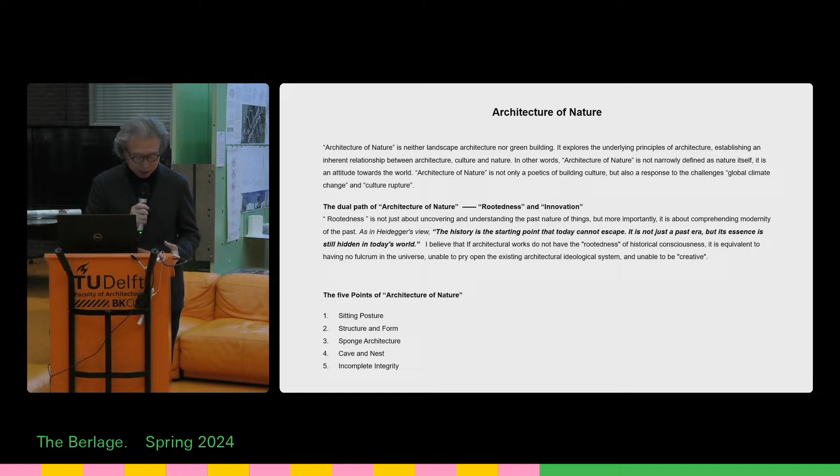I'd like to quote Heidegger's view that history is the starting point today cannot escape. It is not just past era, but an essence still hiding in today's world. I strongly believe that if architectural work does not have rootedness or historical consciousness, it is equivalent to having no fulcrum in the universe, unable to reopen the existing architectural ideological system, and unable to be creative.

There are five points for the architecture of nature: sitting posture, structure and form, sponge architecture, cave and nest, and incomplete integrity. This incompleteness constitutes a deeper level of integrity within a larger system and broader context.

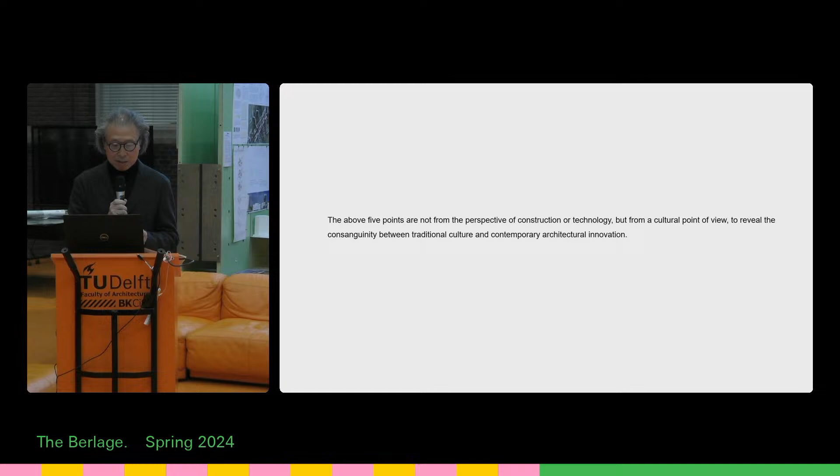I believe these five points for architecture of nature are considered not from the perspective of construction and technology, but from a cultural point of view, to reveal the consanguinity between traditional culture and contemporary architectural innovation.

The first project I want to discuss is one I realized a few years ago in a very important porcelain city in China, the Imperial Kiln Museum in Jingdezhen, Jiangxi province. Jingdezhen used to be the porcelain capital of the world. During the Ming-Qing dynasty, it exported huge amounts of porcelain to Europe. Even in Delft, if you go to the museum, most of the porcelain, the blue and white, or even the green porcelain, came from this city, Jingdezhen.

During the Ming dynasty, it became the imperial factory, making porcelain specifically for the emperor. But this city grew naturally because of the porcelain industry. It started from a bottom area called Sanbao during the Song dynasty, 1,000 years ago — the early Chinese porcelain actually goes back to that period.

In the middle period, you see Luoma Qiao, from the Yuan dynasty. This area produced porcelain like the famous blue and white porcelain — probably the most identifiable Chinese porcelain, whether in the British Museum or the Metropolitan Museum. A lot of that porcelain comes from this Yuan dynasty period.

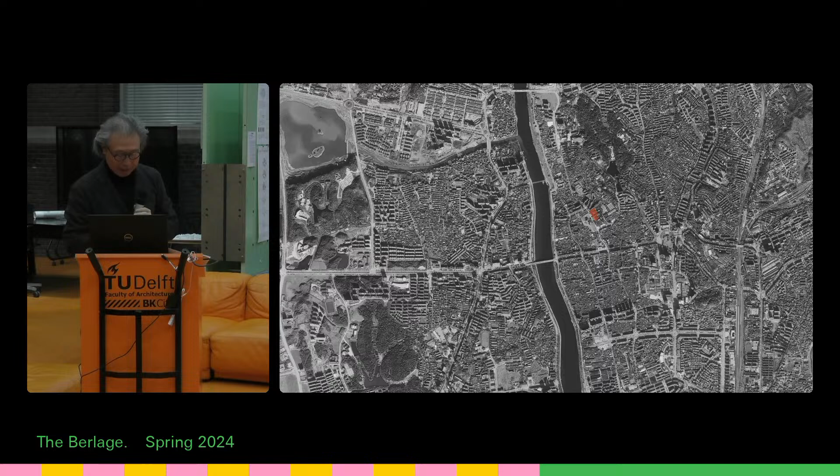Later, during the Ming-Qing dynasty, you can see they started to produce not only blue and white but also more multicolor porcelain. This shows how their industry developed based on nature.

This river used to be the west boundary of the city, and the city grew from south to north. So it always developed along the Chang River. Even 20 years ago, beyond the left side there was nothing here—only forest, hills, rivers, and creeks. This was pretty much a nature-dominated tradition.

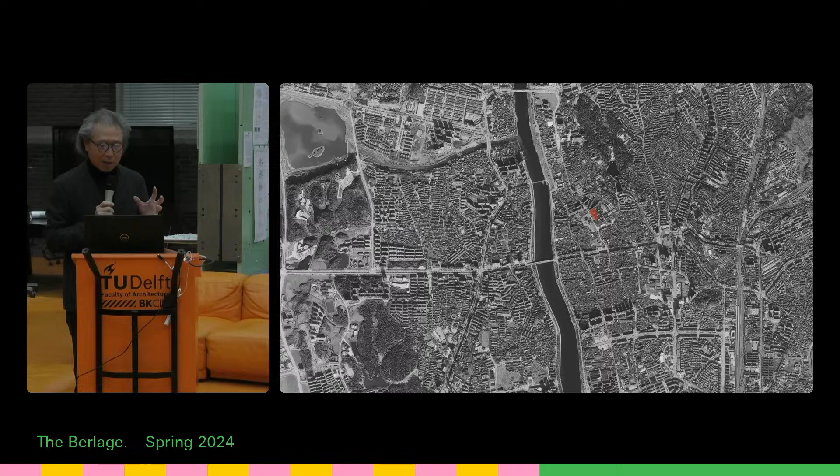The reason they came here is because they have very special soil, so people migrated from far away just to build a brick kiln and make porcelain. This was their whole life. The red star marks the location of our project.

If you look carefully at this urban fabric, the small alleys not only connect people from their workshop and kiln to the Chang River, but also give a sense of how people survived under extremely hot, humid climate conditions. The roof overhangs and small alleys create shade during summer and protect from rain.

Once you go through the small alley into the housing, it's very special—a vertical, tall housing, like 3 stories high, but the courtyard is not flat. The courtyard is more like a vertical chimney, a tap, creating a chimney effect to deal with the heat and weather.

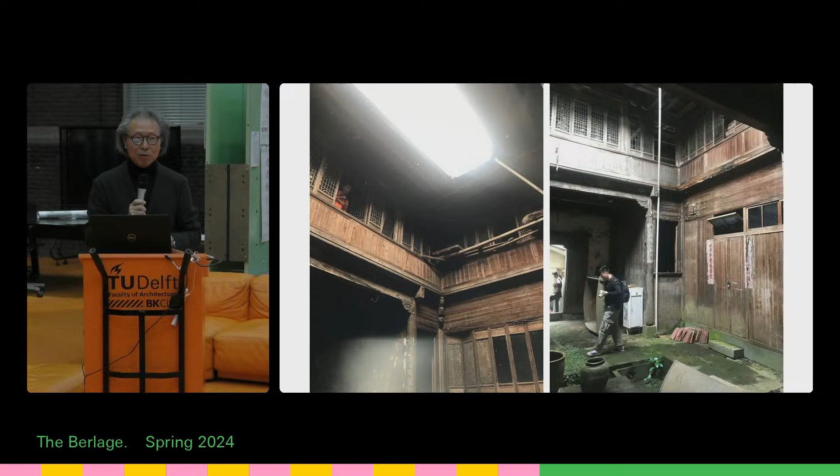But the small alley is more like a wind tunnel. Even in summer, when you walk into this small alley, you can still feel the wind against your body. This gave us a lot of inspiration on how to get ideas through this nature-based tradition.

This is a typical cell of the city—brick kiln and workshop. You can see the workshop here, but they also build housing adjacent, which together forms the whole city. The whole city is built based on this complex.

When I was working on this design, I was wandering in the old town and found craftsmen rebuilding the brick kiln. They frequently rebuild it because it's a very thin brick shell that can only survive maybe a maximum of one year—you have to demolish it.

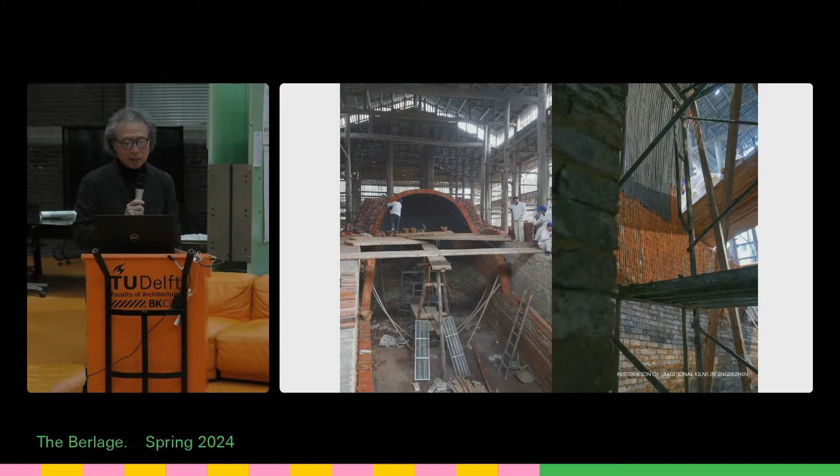When they build this brick vault, they don't use scaffolding. They rely on the material, taking advantage of gravity. This film actually shows what I'm talking about—look at how they control and make this masonry.

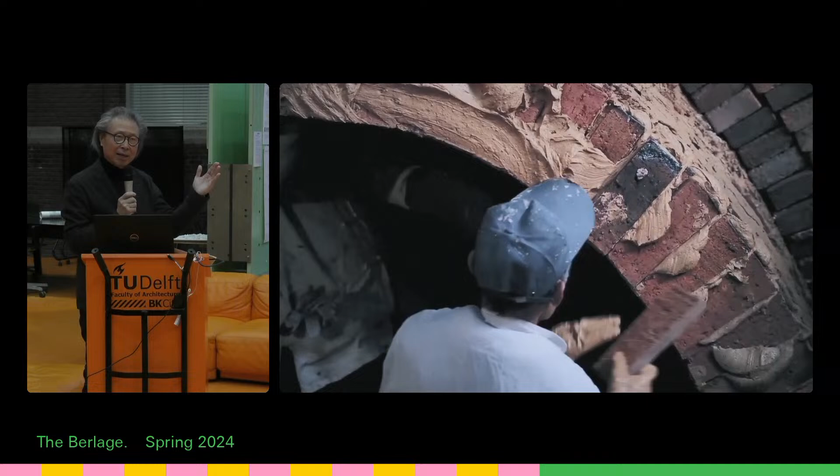They use their fingers to control the curvature. Each horizontal cut—each brick layer—is one horizontal section. You can see it carefully. They use very light, thin, small bricks to make an egg shape as a shell, relying on gravity and the material.

But if you think about it today, when we work with digital design to deal with such complicated double-curving forms, we always cut through sections to transform the three-dimensional curvature into two-dimensional. This is how we approach complicated forms today.

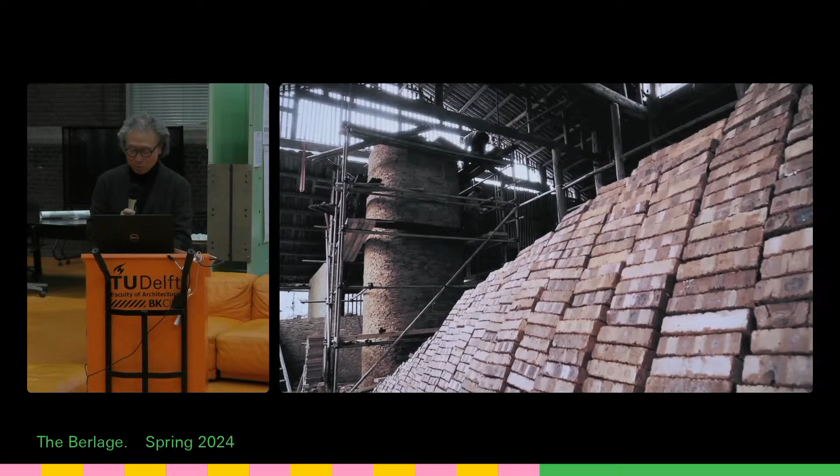But this has some common sense with the old traditional kiln—the craftsmen also used a similar idea. Another important local phenomenon: since the brick kiln has to be demolished frequently, there's a lot of broken brick, so local people recycle this brick to rebuild housing almost everywhere. This is their tradition.

This is the site—you can see the adjacent green part, which is the imperial kiln relic site. There used to be a lot of workshops, but right now almost nothing remains above ground. The adjacent area used to be a fire station, but they relocated it. We're going to build the kiln museum here.

Looking at the surrounding area, it's such a complicated urban fabric—traditional housing mixed with kiln complexes, and also a lot of factories built after 1949, maybe 10 huge factories, plus social housing typical of the early 90s surrounding this area. You feel the whole city became based on different periods of time.

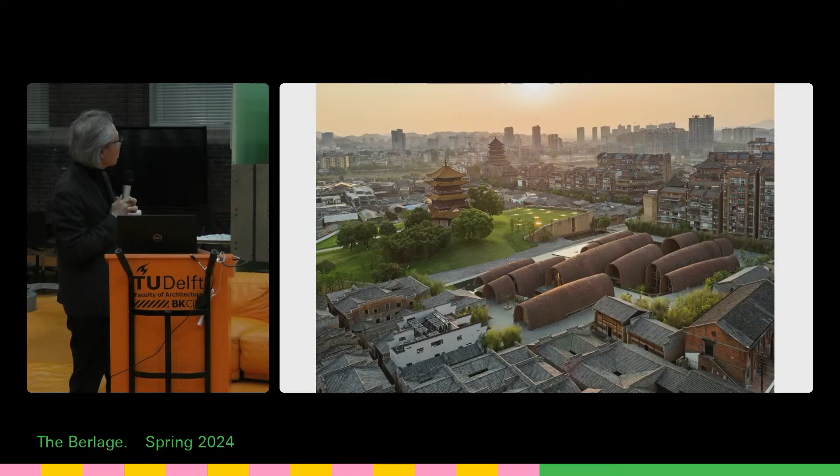Not only the physical form, but you also bring the light in, leaving a lot of space. For example, you can feel the cave and the nest—some space much more enclosed, sometimes really open, in structure and form. You can feel the whole vault structure isn't trying to build beam, column, and then top above the arch. Actually this whole structure, this form, is the architecture form. So that definitely shows strongly the sponge architecture concept—not only the porosity character, but also showing the potential for the program.

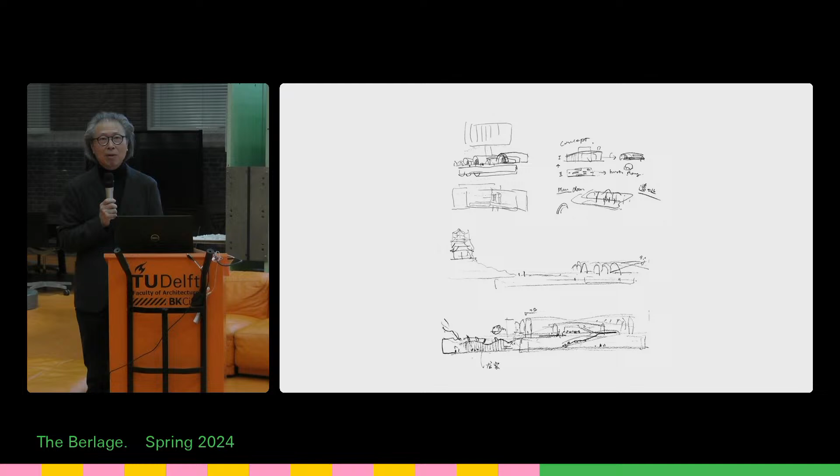But today's topic is like roots, right? The roots I consider—why I choose this architecture form or material—is actually more cultural decision making. The kiln complex, not only for making porcelain, but most of the time it became a social involvement. I feel the kiln—the brick, the things—if you think about where the porcelain comes from, it's the brick kiln. People daily working in and out from the kiln. So I feel there's a strong consanguinity between human being, architecture form, and the contents program. This is the reason this museum was eager to recreate a similar experience, but based on a contemporary idea. So this is what I call the cultural roots, climate roots.

One thing I'm really proud of for this project: after we built a 10,000 square meter museum, we never used air conditioning in summer. I think this can give a lot of rethinking about tradition—they also have a contemporary idea.

We used to consider this as very old, the city or architecture. And then we see the style or design process—it's a lot of model making. But this model strongly represents how we worked during the design process.

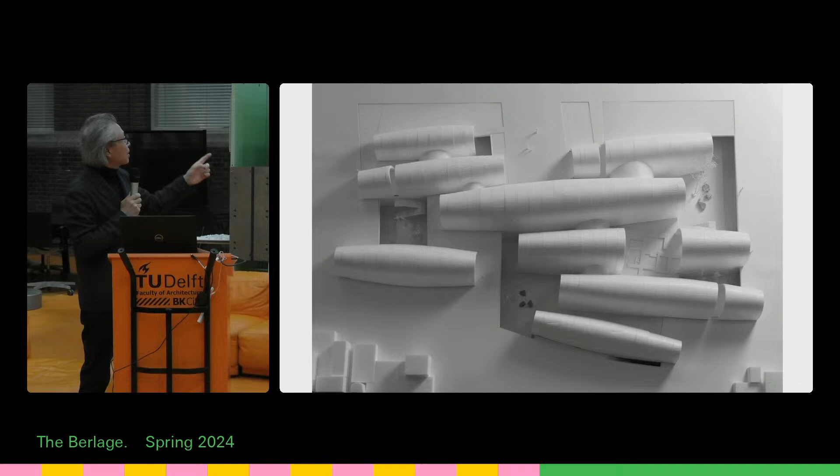I'm not encouraging my team to use 3D print rather than handmade models. Why? Because for this specific design it's so complicated. You feel the challenge, right? You feel this architecture—if you really try to realize things, each vault has a different curvature, different size. But even for each individual one, maybe bigger, smaller, always changing the curvature. How do you do that?

So I strongly believe architecture is not sculpture. We cannot just rely on modern technology to meet the challenge. I think that's not smart—that's also not the nature of architecture. Architecture is supposed to be based on geometry, based on a system, simple, easy to build.

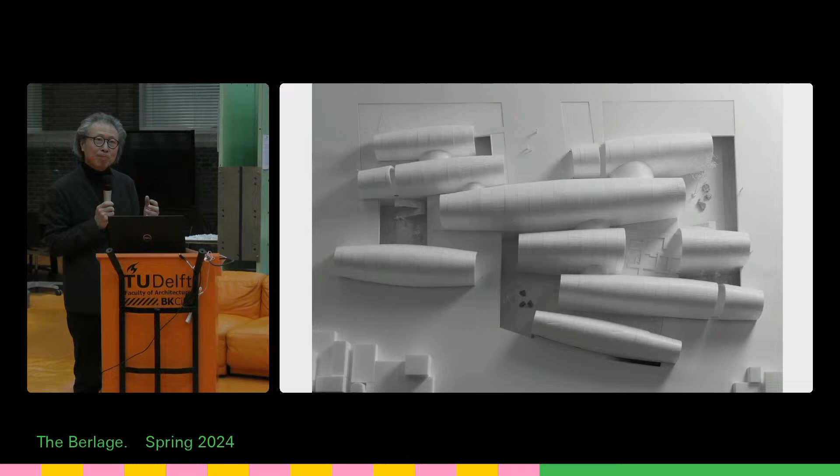But this model gave us a lot of confidence. If you look at the detail, the horizontal cut, that allows you to think about how the craftsmen built this complicated brick kiln. So that gave us an idea of how we could build such complicated architecture based on a very simple construction process. Once again, we did many different scales of the physical model.

This is the reason sometimes the computer just really pleases architects. When you see it on the computer, maybe in reality this space is so dark, but it gives you a comfortable lighting adjustment—or maybe too bright. But after you build it, you might face the disaster of it being too dark or too bright. A computer always lets you feel so comfortable, so we have to rely more on the physical method, like models—I think that's really a good way. But the computer, the digital design process, is still an area we have to rely on. We just have to really consider them as tools rather than letting them drive everything.

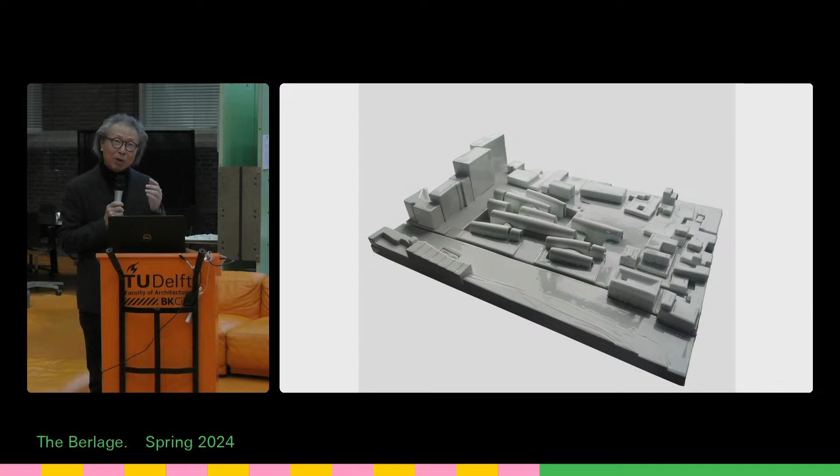So many models were made during the design process, but except this one—this is not our design model. This is us trying to translate the architecture model into a piece of art. Currently this model was collected by MoMA, showing the whole model-making process, like what we create as the architecture.

So this site plan—you can see a strong orientation to dialogue with different urban fabric and construction style, and then a lot of recycled brick. You can see this brick became really broken pieces, really small. You have to use new brick mixed with this older brick.

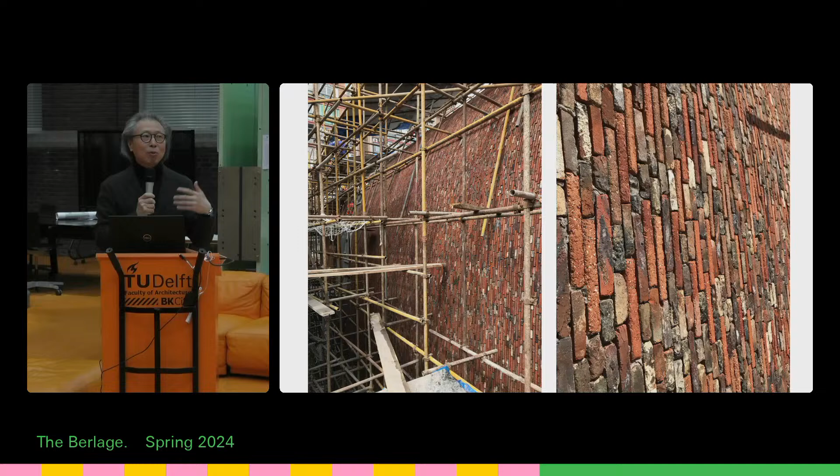So this is pretty much when we're doing the construction. You can see the different bricks mixed together, the old ones and new ones. Even the new bricks contain a lot of trash from their porcelain making, like a pottery kiln case, they contain porcelain from during the burning of the porcelain. After it became mesh, it became one of the materials for those bricks.

And then this is the important scaffolding we invented. We needed to think about how we could create such variation in size or curvature change. The scaffolding we invented sits on a track, so it can move from this way to another way.

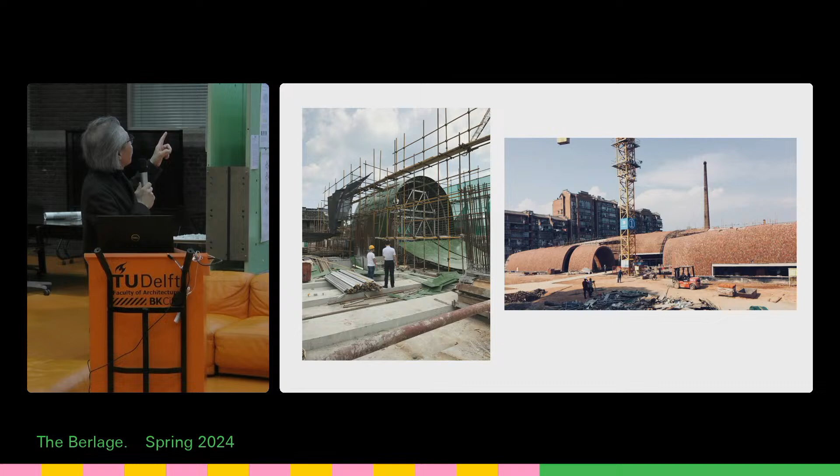We just use very soft wood forms with the scaffolding to adjust. This scaffolding can be adjusted, and then we can control the curvature with this very soft wood form. Piece by piece, like in the starting model we did, eventually the curvature changes along the construction.

And this is after we built it. This whole building somehow lays prone in the ground, right? Rather than really monumental, it's very low, very humble and modest, in dialogue with the factory and the historical housing.

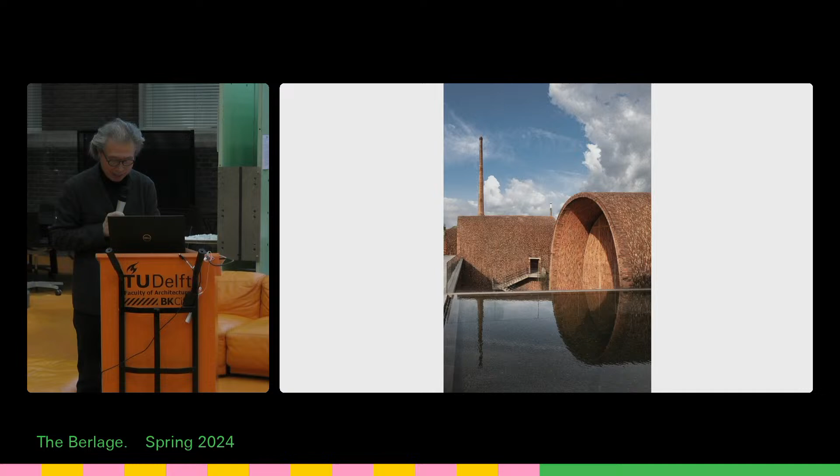Once you walk on the gravel floor, it produces sound, and you can also listen to this reflecting waterfall, they have a lot of water sound, making a huge contrast - very rough brick vault contrasting with peaceful water, and also beyond the factory. When you close up, you're going to see a lot of material variation.

You also feel, when you walk along this waterfall, you see bamboo beyond. This gives you a sense of the Jiangxi area. If you go to the suburbia of Jingdezhen, you always hear the creek sound, but you never see the river or creek, only the bamboo. The bamboo also produces the sound.

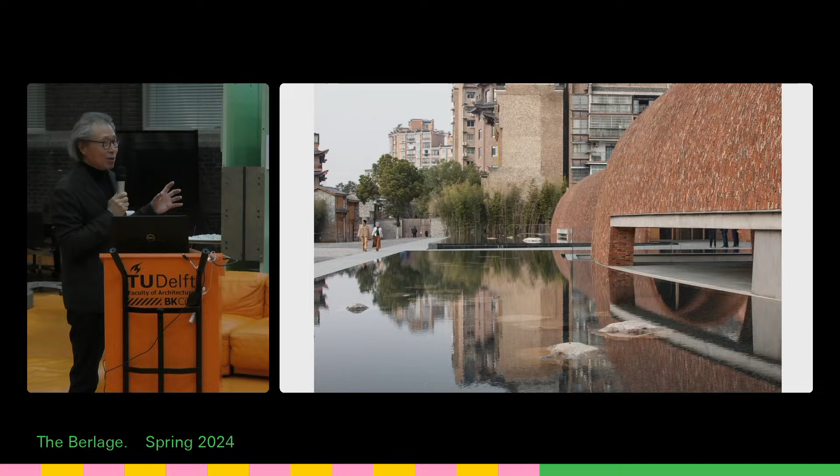And this water also represents something poetic, the way you see the stone underneath. The stones are more like a group of fish underneath the water, but only a few of the stones pop out above the water. This not only gives you an artistic feeling, but also a lot of imagination, like early Chinese philosophy, which considered the universe composed of water and three islands.

But in this modest way, it gives people guidance on how to flow into the museum. It's not that you feel the solid brick vault is against the people - actually you can feel it welcoming people to wander, following the water's gesture, flowing into the museum from outside.

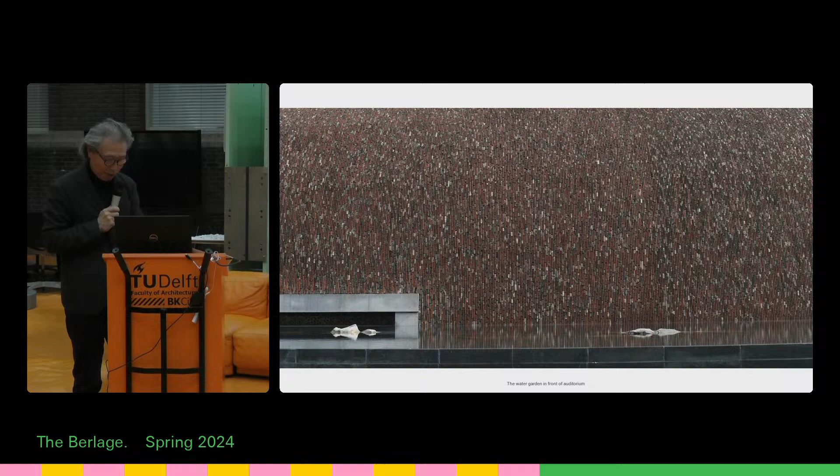And this also shows a strong tectonic character - concrete beams and columns make this horizontal window, the cube, or the vault, supposed to go from the bottom to the top. When you're cutting this, you have to find some concrete way, but it turns quite poetic. You can have a sense of imagination about this old brick, and there's always space in between, interior or exterior. This is not totally like a strong object.

When you walk in through the big arch, you're going to follow more natural light, and you start your journey more like the major permanent circulation. Then you go to the right side, to a secondary arch, which brings you into the bookstore and tea house beyond. If you continue another way, the smaller arch actually connects to this linear vault, which brings you to the auditorium room.

I think in architecture, you have to create certain different gestures. The people walk in, they know where they are. They have to figure out how they're going to freely flow into the major circulation. Definitely, you also create a kind of mystery - you feel, okay, this is the museum, but I saw a few vaults beyond. And then you start to explore more.

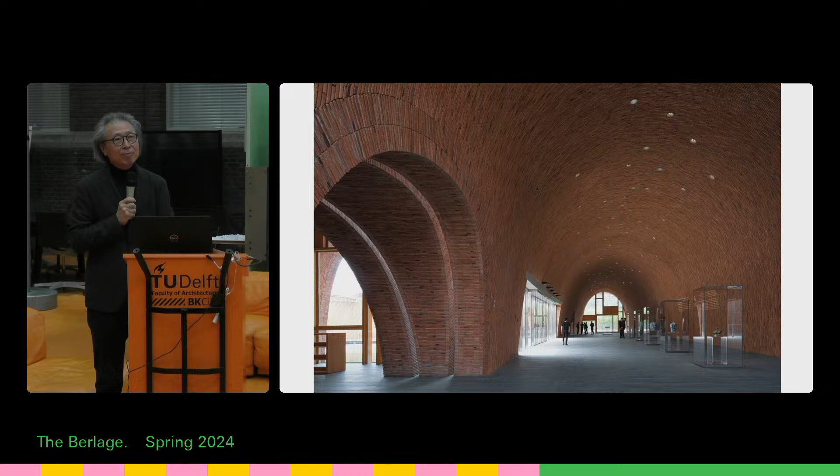You start your journey, and then from interior, go to the in-between, right? This is like an open vault. It's not 100% interior, but it works with the ruin site.

This ruin site was quite a surprise for us after we started construction. When they were breaking the ground, we found some ruins. We tried to integrate this relic into the museum, and that gave the museum much, much stronger ideas to really integrate this piece of the site.

The closed door side, this open arch underneath is the amphitheater, and then beyond is actually one of the galleries. But just remember that this is a porcelain museum, a ceramic museum. It's not an art museum, painting. You have to really care about humidity, but here, it doesn't matter.

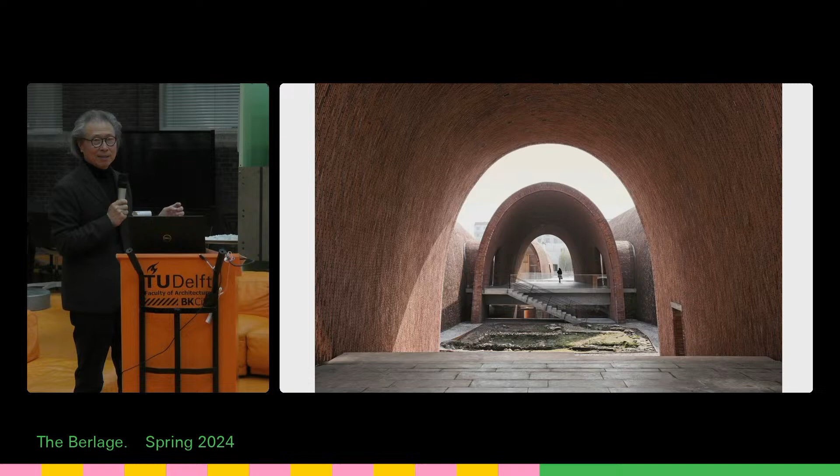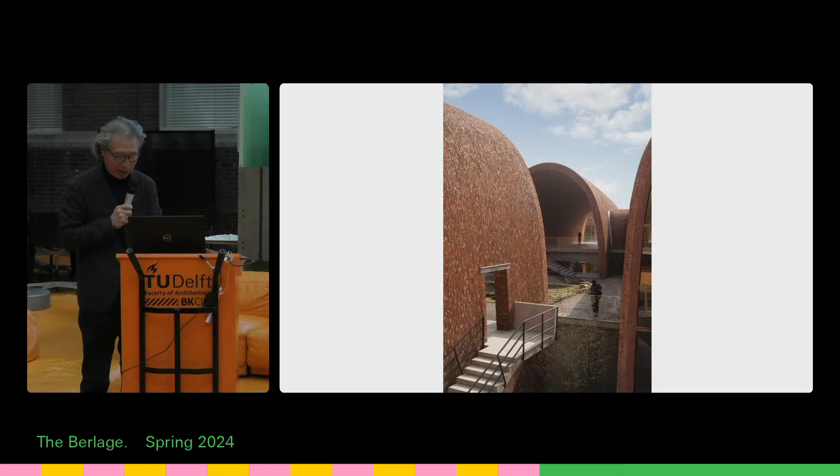Once you go down close to the ruin, you can also see beyond - another courtyard, and then downstairs, which is more the major space for the exhibition, part of the exhibition circulation. From a different angle, you can see how rich it is in terms of space and level change. This is interior level, then you go to the Ming Dynasty ruins, urban city level, and then you can continue down to another courtyard which is actually in the lower level.

Once again, you move from the half-outdoor, half-indoor space into another interior space. But this is quite different from the foyer, right? Because they're much smaller, much lower, and then they carefully worked this object in transparent glass.

And then you turn on this concrete subtle stair, flowing down to the basement level. When you go down, you're not facing against the wall - it's very nice, very light, the sunken courtyard.

People flow down to follow this courtyard. You can hang out outside, you can smoke, you can have some break. But at the same moment, you're going to see a lot of museum people working inside their working space - that's part of this permanent exhibition circulation.

When you see the transparent glass, it never really attaches to the wall, right? It's also not perpendicular. This interior space is more like a fish belly, and the configuration for this glass is more like a fish bone.

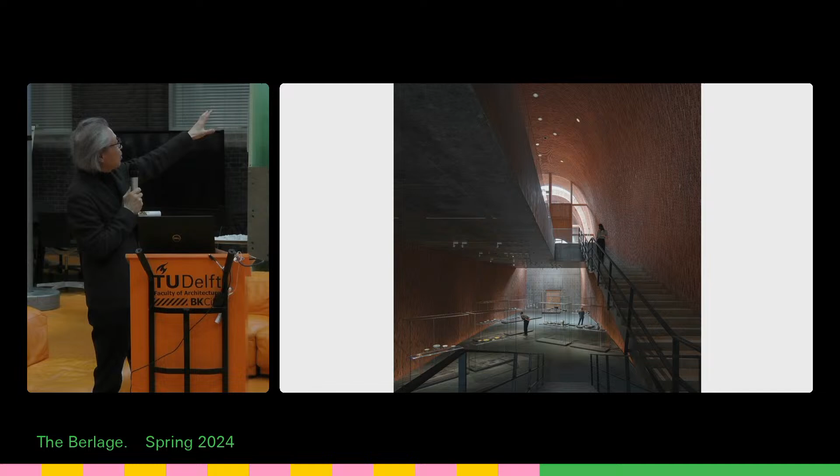I think once again, this is exactly what I really emphasize - the consanguinity between the contents, architecture form, and human being. You can see it's very intimate, more like people walk in the cube to see the porcelain.

This is the reason I always ask where porcelain comes from. Porcelain doesn't come from the natural side. It must come from the artificial, the facility - people create a kiln just to increase temperature. Porcelain needs 1,300 degrees, so in nature there's no such high temperature.

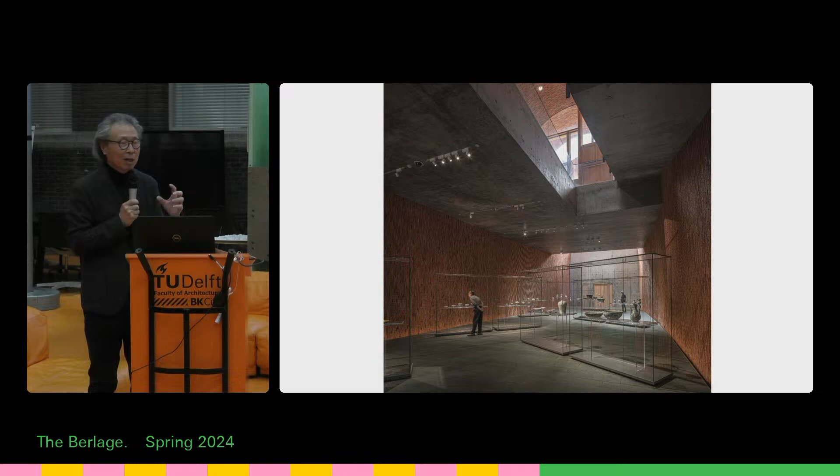Also, porcelain needs - not like a painting where you see it one way - you need to look at it 360 degrees around. You need to walk around, and then you can see the bottom, you can see the top. So even this, like a table, everything is transparent. This is not designed by somebody else - everything is designed by our studio. Architects actually do many things.

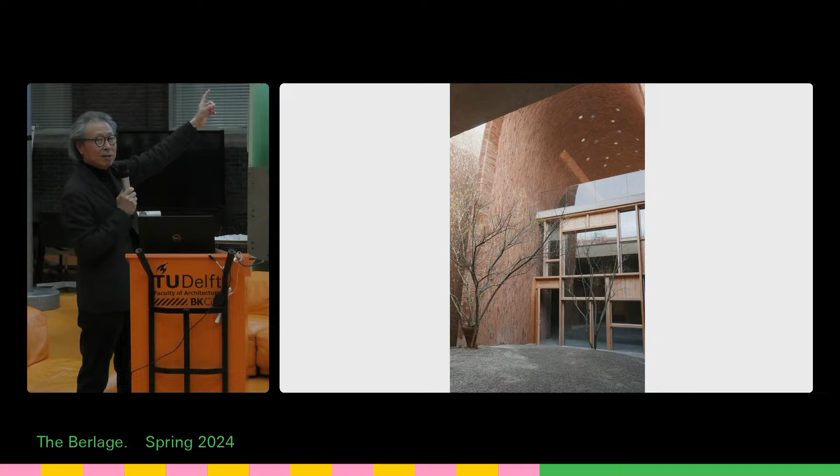This is once again, you go into another courtyard, but you can see upstairs, the tea house, right? Covered, and then interior. You're crossing this little courtyard into a different program. And then this is the end of the major circulation, the permanent circulation.

One way you can see beyond - for example, you can see the end is like the courtyard. We have a lot of foundation that was excavated during the construction.

And then once you go back, you see the stair. You start wondering where I'm going to go. If you look at this atrium, this is the only big atrium in this museum, located at the end of the circulation. You're going to see where you started from.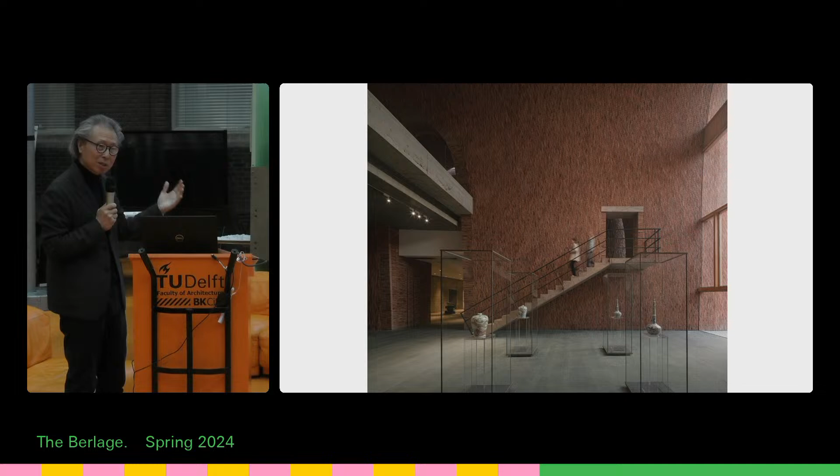The stair never shows the whole thing - you only see half, and that creates a kind of mystery. You see the door, you see the light, but you don't know what is beyond. That's going to attract you to climb up the stair. You see this mystery, right?

It's natural light brushing on this wall. People going to use their hands to touch things. You have a lot of recycled material containing the timeless memories. Architecture is not only visual art, right? It's more like associations - different light, touching, even smelling, and so on.

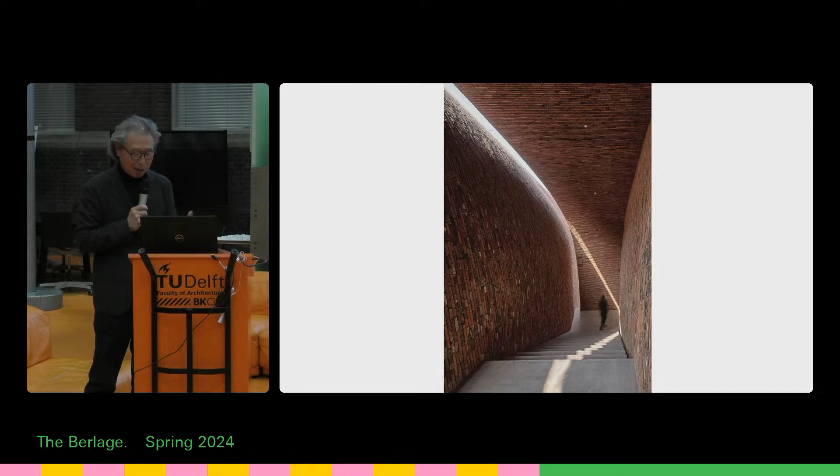So once you're climbing up, you're back where you start, the foyer, and then you're going to see the little atrium from the lecture hall. Once you walk in, you see this whole vault covered, one like today, right? It's more like a chapel of the academic - people gathering here, you can join the symposium at the same moment.

If, for example, today maybe I'm talking very boring, right, at least you can see something like this window. You can see through that horizontal cut. I mentioned here, beyond is going to be a water reflecting pool, and also beyond is the ruin site. This is a tea house.

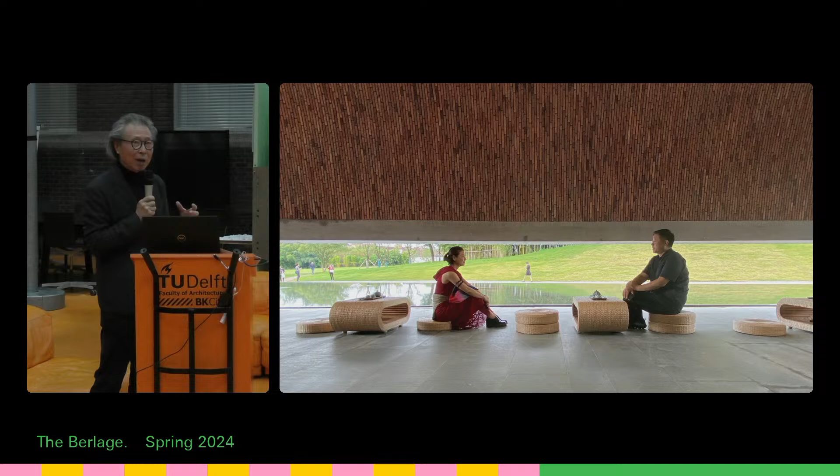So once you concentrate, like in the bookstore, the wall is going to block your eye, and then somehow to invoke you to sit down.

You sit down, you see through, you use this water to reflect in the sky. You see through, see beyond, ruin site. Things ruin always talking about the underneath earth, right? So this horizon became quite interesting.

When you drink the tea, use Jingdezhen porcelain, and then you pretty much enjoy this heritage. This picture showing the strong character for how this architecture, based on the system, how they ventilate. How transparent - even some wood doors, wood windows, they can operate, open, and then one can be concentrated.

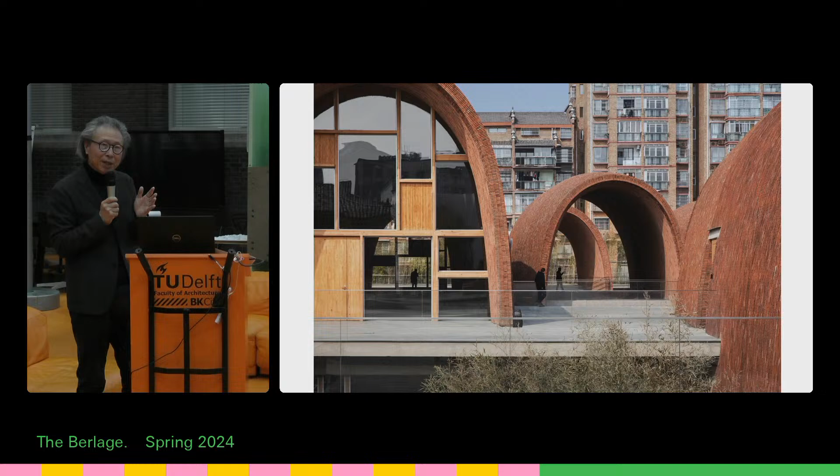If you recall, in general overall, the building, they somehow not only parallel layout each vault - they more like assignment, kind of, they have slightly angle to dialogue surrounding to create a tension between each break of the vault.

So maybe I'll talk a little bit more in detail about this project. I really want people to share what is the idea behind it. The second project is what we're working on now. This project actually just started last October. The first project talked about porcelain. This is talking about 4000 BC, more like a New Stone Age pottery.

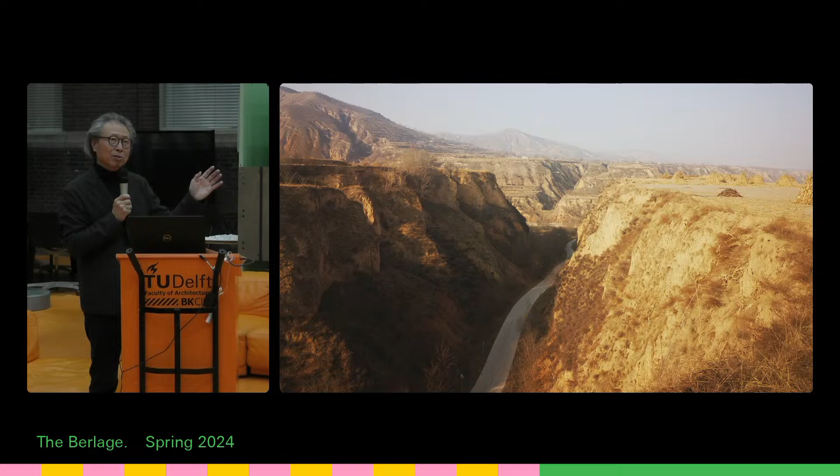This project is located in Majiayao, Gansu province, Lintao. This ruin site settlement was discovered by the Swedish archaeologist Johan Gunnar Andersson in 1924. Actually, he was traveling along the Yellow River, much further upstream, and he found a lot of painted pottery. So he realized there must be a civilization here, along with excavating so many pottery pieces.

But this geography character gives you a sense of how the local architecture is supposed to be. The clay - you cannot, based on it, like a stone masonry, right? You're more like carving out, more like a cave in this specific side.

So this is three - you can see the ruin, right? This is the ruin museum, just adjacent to this heritage. And then at the top of the hill, we're going to create an observatory for the people, take a break, more information center.

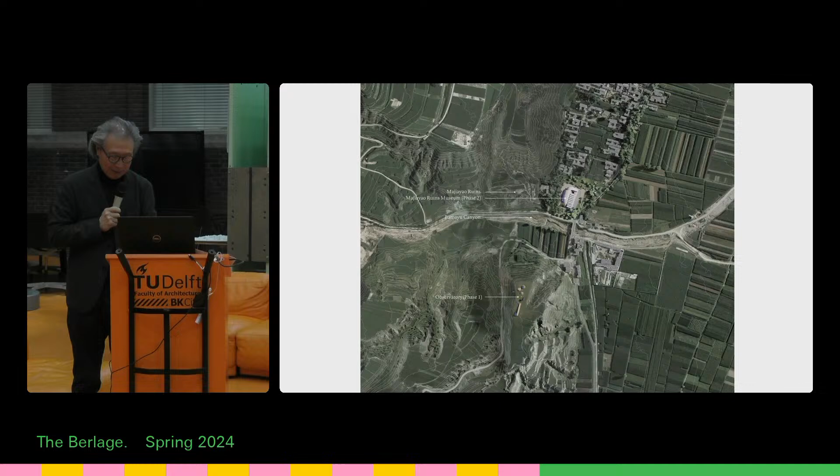So this ruin museum and observatory crossing the canyon. This is a typical canyon, always perpendicular with the Yellow - actually it's the Tao River, and beyond, more like the Yellow River on the other side. So this is more like a whole nature, somehow made by nature. This is a canyon, typical water flowing into the Tao River. And then this is our museum, observatory here.

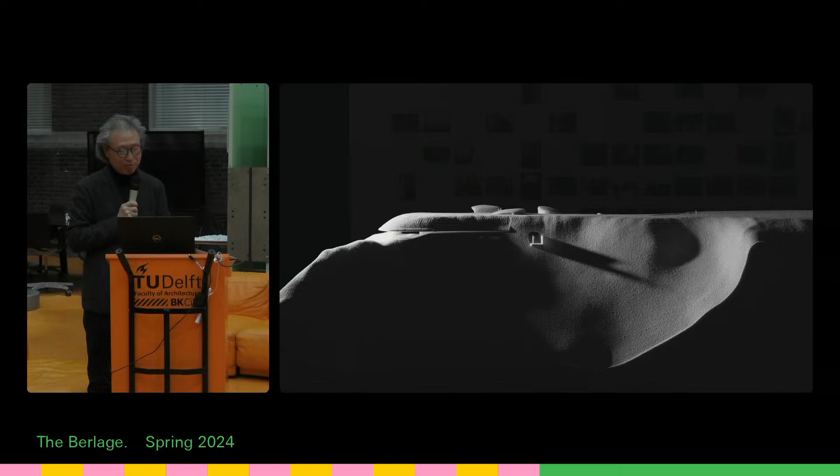This is an early sketch to show how I think about this observatory. Just taking advantage of the plasticity of this soil, making one horizontal cut, more like sketching on the earth - but the top view pavilion indicates like a New Stone Age way of making a sunken shelter for themselves. So this model showing the almost complete design - a horizontal cut hiding inside this earth, with maybe a few holes to concentrate light.

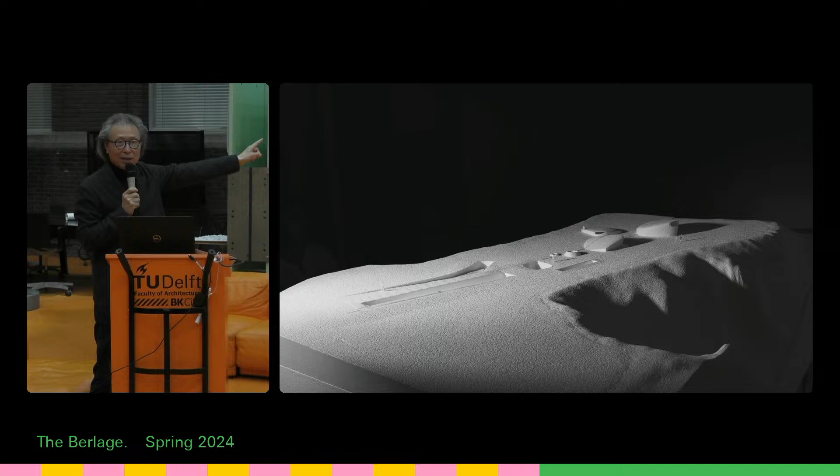But we try to use a very special construction method - for example, this soil is so soft, so weak, we have to carve out on the top in order to protect the boundary of the landscape. And then we're going to make the cave carved out through three sides - one is the horizontal cut, a few holes here, and then the other side. So this is going to be very challenging, more like we're making a tunnel. It's not normally how we build a building, but you can feel the sense of how big it is from our model.

Our designer here - but you can see this, we normally build models based on different scales, along with the design process, experimental design process.

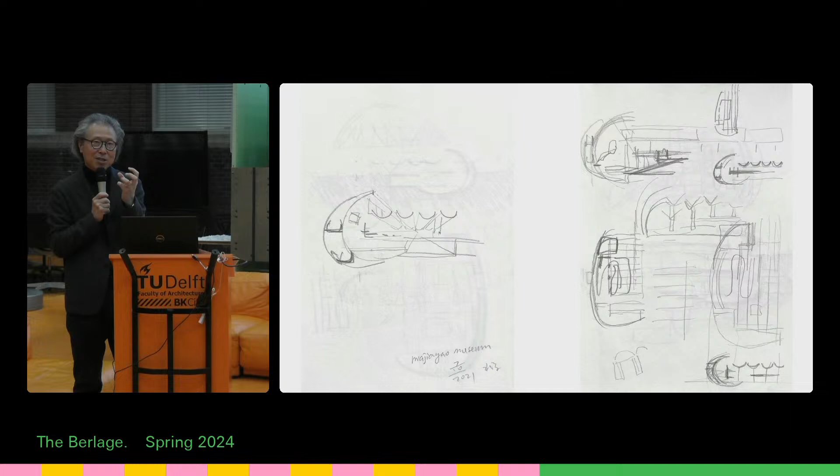This is for the museum, early sketch - but you can see a few things, cave and the nest. Locally there's a lot of caves, but I strongly believe the cave and the nest is a prototype of earlier human construction culture. I really try to use this here to create a sustainable idea. A cave always stays, right? It's very stable in terms of climate change or temperature change, but the nest is so sensitive - they catch light, temperature, and whether winter or summer, they really balance each other. I think this is a really passive, intelligent, sustainable idea.

And I think another architectural idea, which is I always ask - where does the pottery come from?

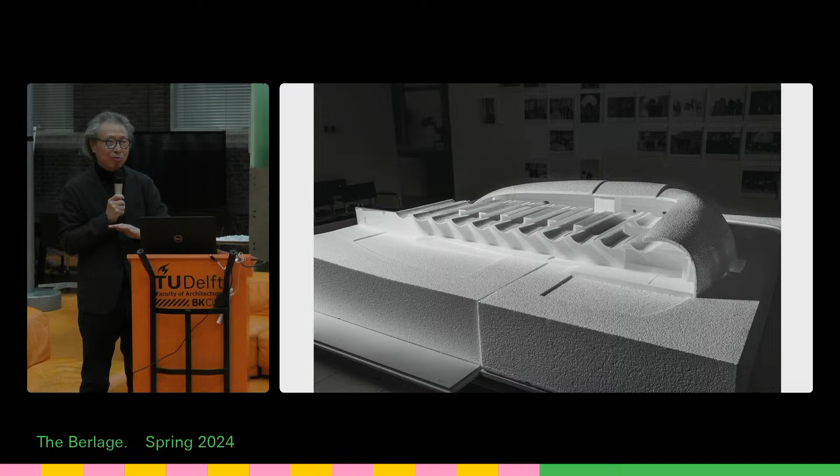They somehow also humble or modest, sunken into the depression side. So this is, you can see, the piece of pottery going against north wind, local wind a lot. And then facing south, going to have more like structure beam with a shear wall together.

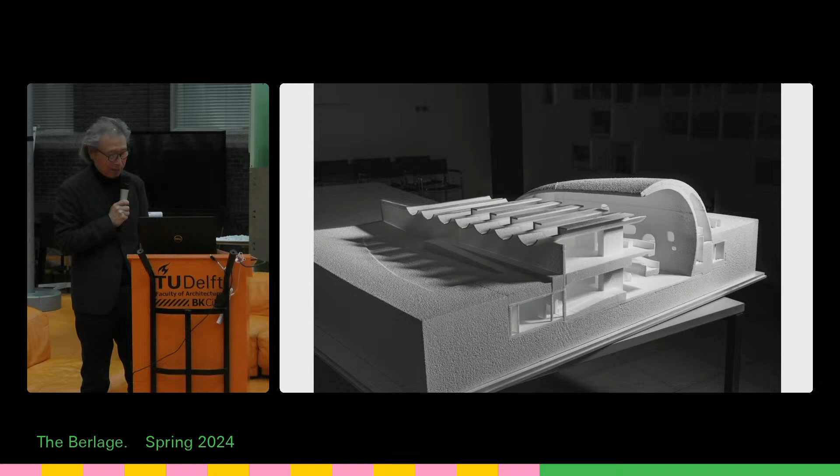One idea is for this museum, also try to recreate a sense of experience of how people were making their pottery. They must go down to the water, the river to carry the water. They climb on the hill, more like a zigzag. Whole museum, just one ramp. Ramp from the front plaza, go in like a zigzag shape, go inside the gallery, and then crossing this atrium.

You can see this ramp continue, go down, and then go up. Even between this shell, two walls, hiding some ramp behind. And then people can walk through the museum without being interrupted by the opaque space. You always can see beyond, always can see the sense about a local large cave on the cliff.

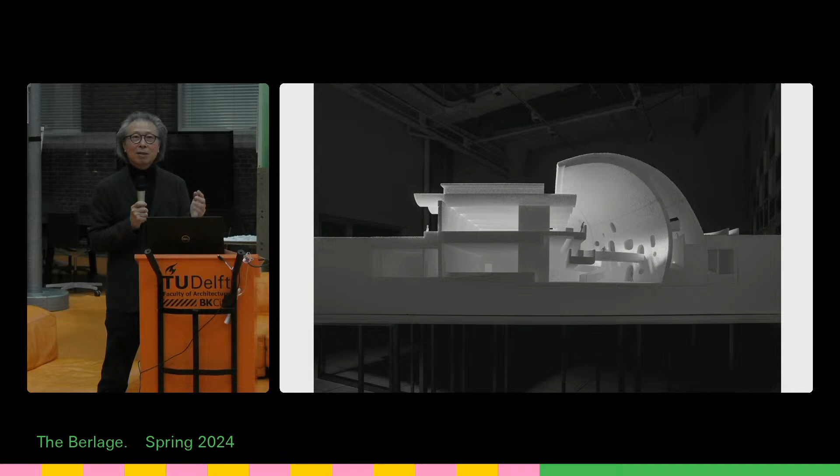This art center was built in the middle of nowhere. You can see the surroundings, very generic, typical commercial real estate development. But this is a building where we test how concrete, we can push the concrete, both tension and compression, into the limit.

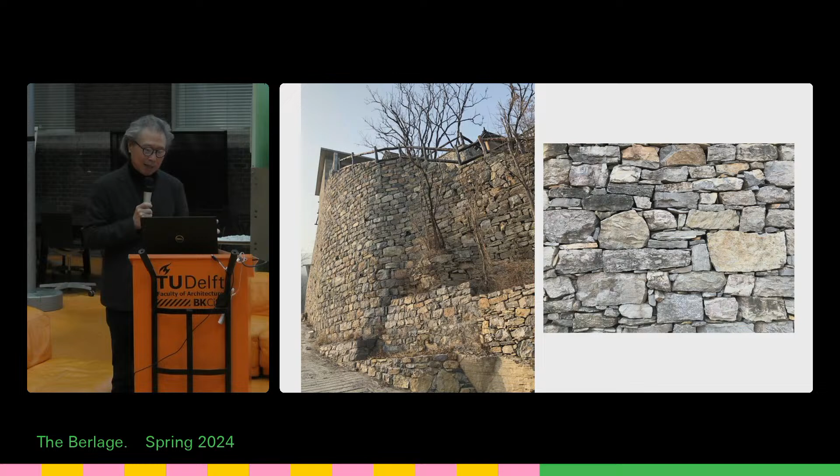So this is like a tent structure, like a pinwheel, to represent how local masonry and wood roof structure works. This is like a pinwheel, the roof forming a central courtyard. This is very typical local housing, and this is more like an early type of school in Chinese tradition—just a central courtyard with a few trees, people sitting underneath the tree with the professor, in dialogue, either in the classroom or in the central courtyard.

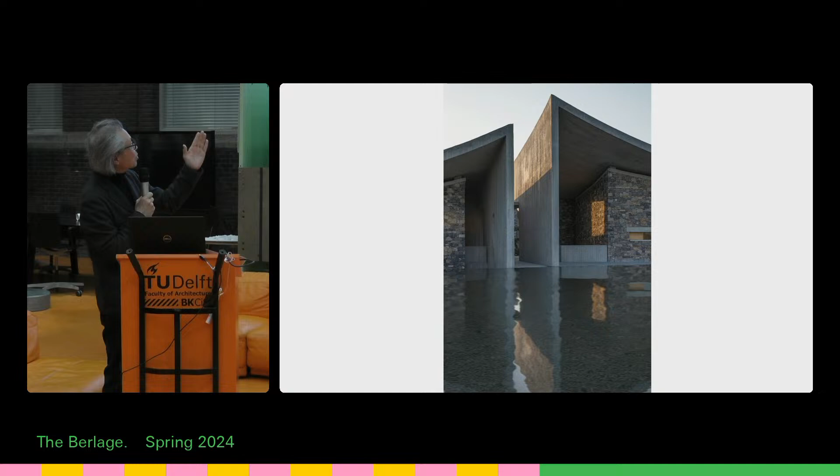So you can get a sense of how this concrete tent creates the tension between the floor and the ceiling, giving people a sense that concrete can not only have the character to be compressed for the roof, but also have the character of tension. So this is shear wall to shear wall, pulling this tent.

They also give you a sense of the large traditional Chinese roof, right? You can see this sunken courtyard, the roof with shear wall, the masonry beyond the window, and then you also can see how people interpret the architecture into furniture. This window, you see the curved roof, you see the masonry stone wall. It's strongly interpreting traditional character into the contemporary.

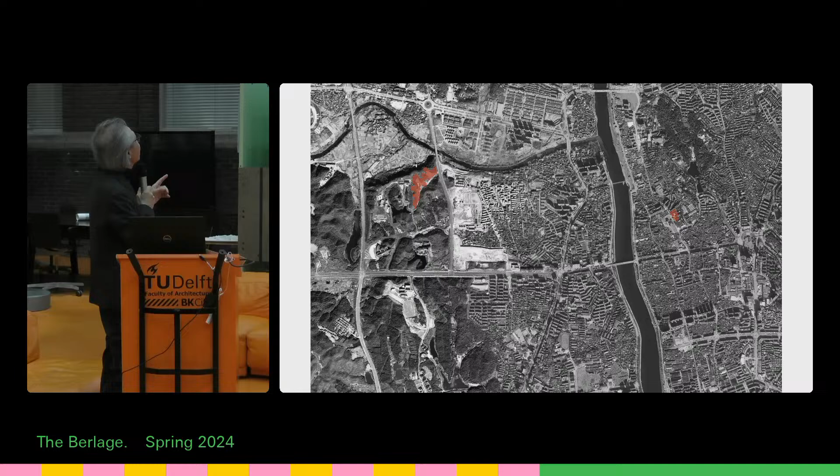Once again, we go back to Jingdezhen, but it's not the historical center area. We were invited to design an international conference center, and then we converted it into a conference camp. I do believe the conference room should not only be a black box, but also needs to somehow associate with nature.

Local, you can see this site condition. If you're traveling in Jiangxi, take the train, you always see the beautiful village settlements. They are always very free, peaceful, very simple—small square buildings, like village buildings, grouped somehow by their farming, their daily work, how they work from the mountain to the farmland.

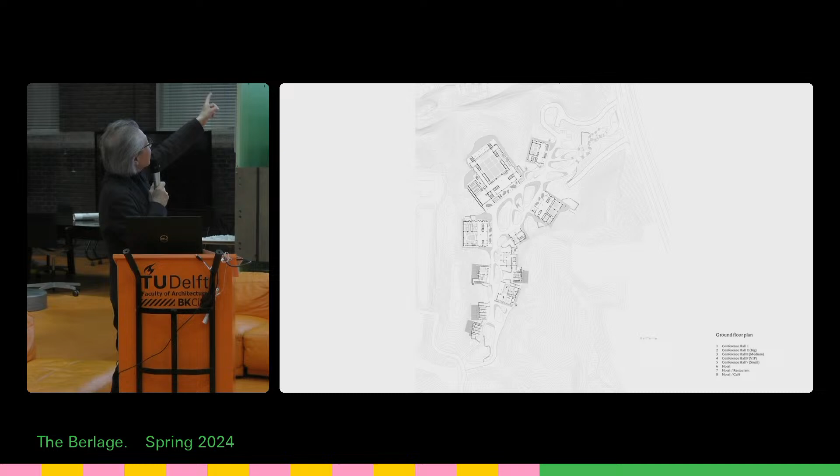This building, we try to fully cooperate with the existing condition. This valley used to be a driving school. They already made a platform in the bottom of the valley, and also cut a few pieces of the bottom hill. So we tried not to make a grand conference center but instead a fragmented form. You can see this form going bigger or smaller, relying on the existing space. This also indicates some countryside settlement character.

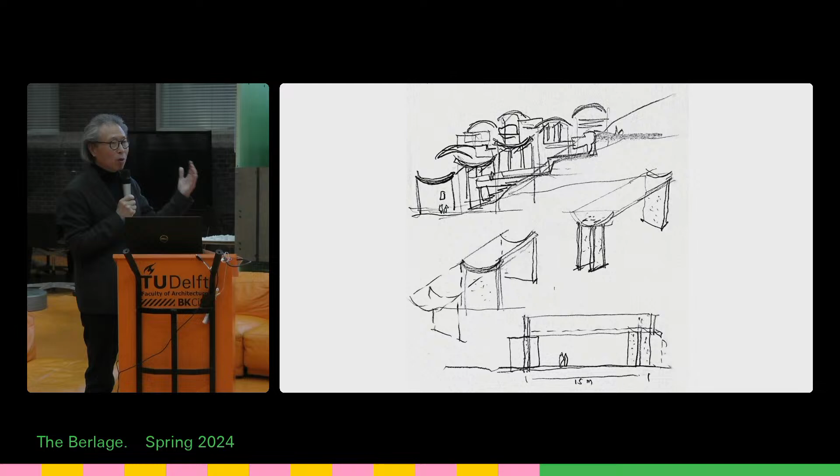Another idea for this project is that it moved so quickly. When we worked on the concept, they started breaking ground. We really had a hard time catching up with their speed. So we thought maybe we had to find a smart way.

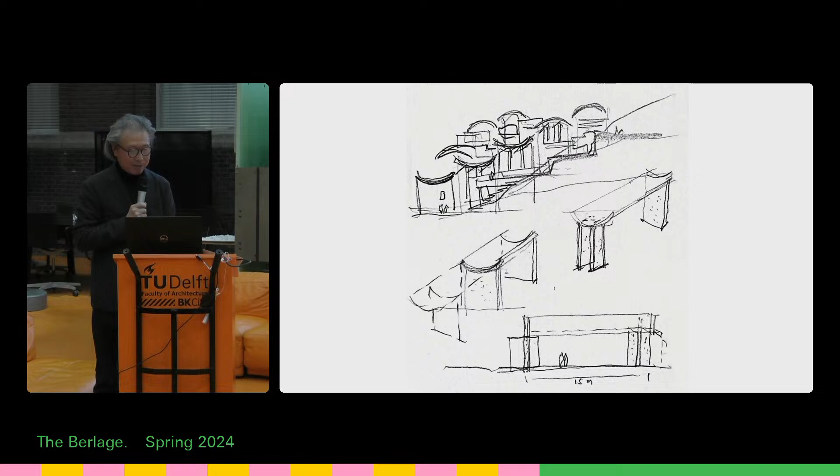Just use one structure, which is 2 shear walls, 1 beam, 1 roof—this beam is the roof. Just one structure we use; it doesn't matter if this beam is upside down or like an arch or going downward, but you can see the whole building is just based on this module, 1-1-1.

They start to easily deal with complicated things, like for example a slope. This is a model we made. You can see the enrichment in this architecture. Even though it's just one structure idea, it repeats frequently in terms of what you need, how much light and how much roof overhang you need.

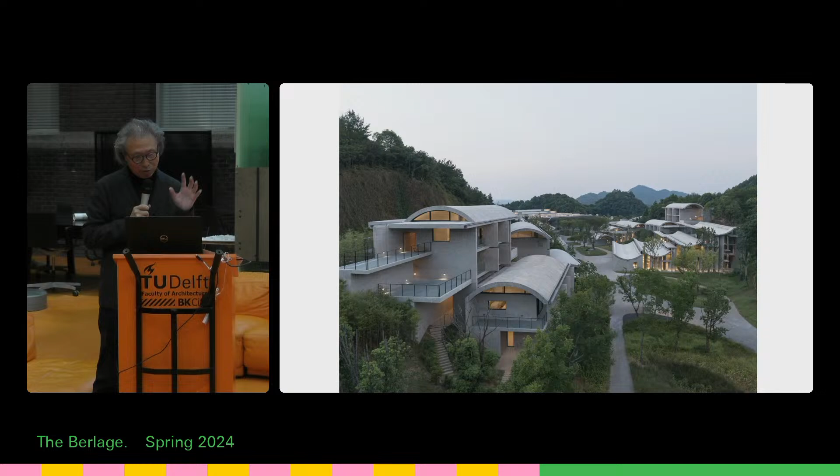This is from one way, a little bit higher on the hill, to look through the whole valley. This has become more like a camp rather than a big building.

This image is strongly showing, very clearly, the structure module, right? This one structure, another one, they climb up the mountain. In between, this creates a lot of opportunity. For example, light can go inside between two structures, between unit structures.

And on the side, you can see we use a different shade wall to reflect the sun angle, how you block sun, but at the same moment you also can bring soft, lighter light in.

This locale, as I mentioned before, is very humid, so we create a lot of space in between, with a lot of overhang. You can see people can stay on the terrace, underneath the roof, climbing the stair, but you have a huge roof overhead. These not only create shade and protect from the rain, they provide a lot of opportunity for people to think.

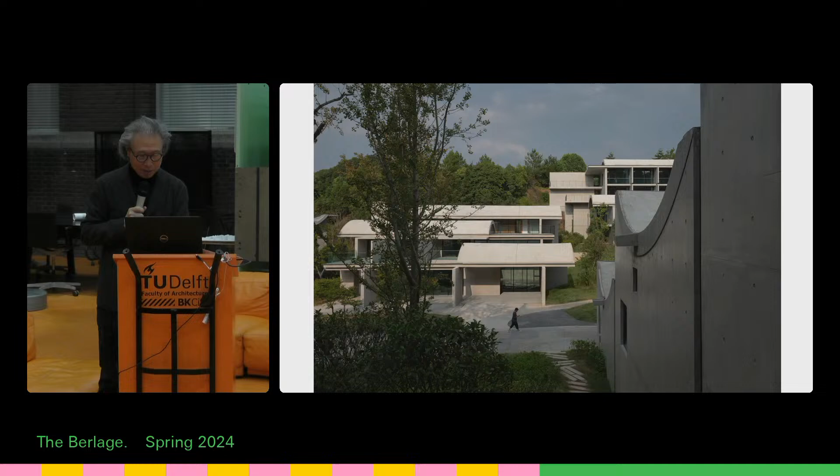About what is a revolutionary idea for the meeting room, right? We encourage people to feel the lighting change, the climate, the daylight, nightlight, and so on.

So you can see, even for this hotel, we use a column-free whole design, more like a roof and shade wall, the canopy, and so on.

You can see this is almost like you can hang out, walk, or wander inside this building. You can have a small casual meeting outside of a conference room, but underneath the roof, protected from the rain. Local rain is a lot, so it's definitely very humane.

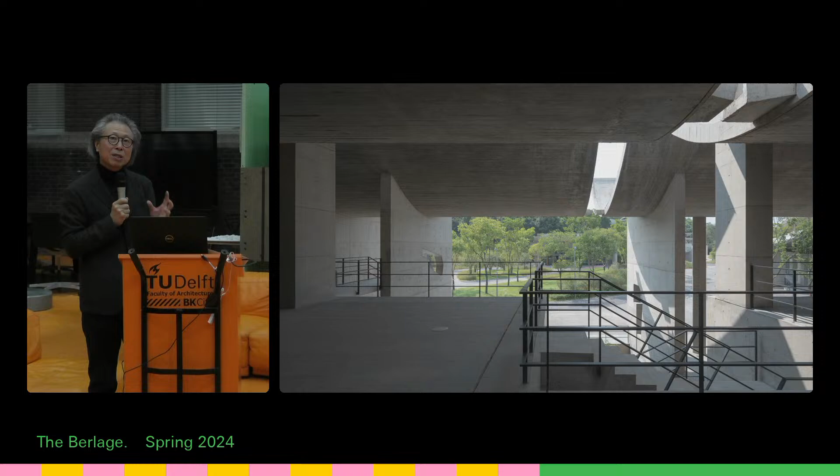For example, this space will be part of the meeting place. But at the same moment, in complete integrity, as I mentioned, people can interpret how we use this building. We're not only doing very precise programming for each piece of architecture; we want to leave some character incomplete, so people can interpret how to use it. Different generations have a different sense of using this architecture.

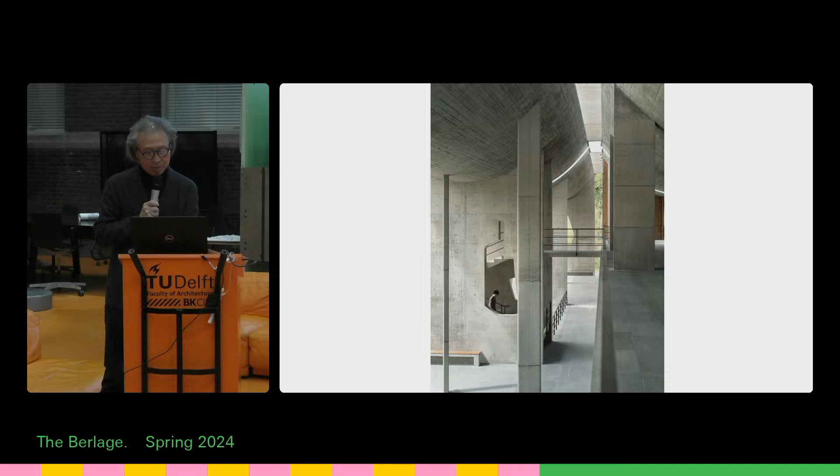So this is like a central landscape, there's always some space like that. And then the mezzanine level, a lower level. So you can always have a dialogue.

Once you have the shade, you go into the atrium, more like a foyer or lobby for the conference, and then you have different conference rooms, each with a different composition for the material identity.

And then you walk in, you can see the light, right? But this light can be 100% controlled. You can block it. The folding wall can be totally enclosed, but most of the time you can also interpret it into a more transparent condition.

This is like a mid-size conference room. Not only skylight, but also through the upper window. It's very functional—people sit here and have the meeting—but at the same moment, you can see beyond, how we carefully deal with the landscape.

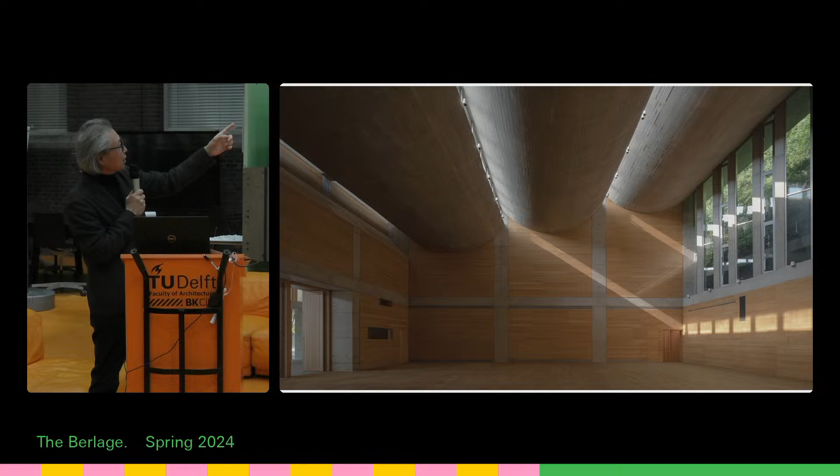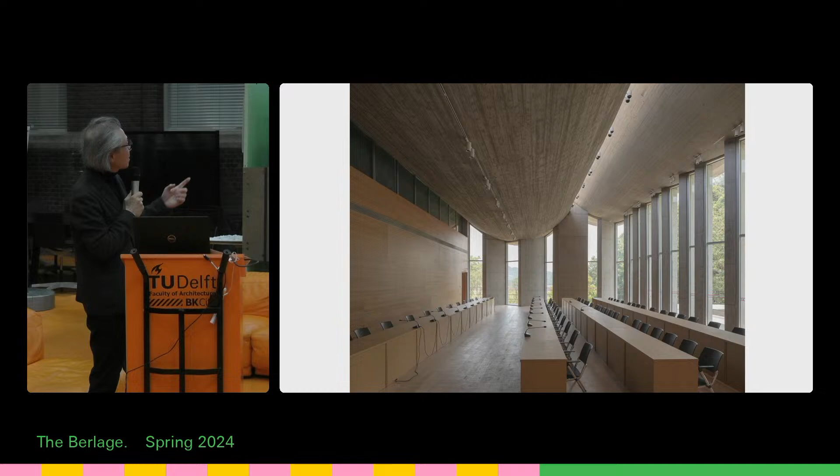This building can tell you, basically, that it's in touch with the existing landscape and condition. And then, different from each other, we have so many alternatives for the conference rooms, so people feel the real change. You have a big one, a small one, different shapes, rather than everything being in a cubic space or inside a black box. People can also walk outside.

You have a bridge connecting to the mountain, and then the next one is in Anhui province, more like the central south of China. The local area has a very famous housing type, which is a vertical courtyard house—I call it the vertical courtyard house in Anhui province.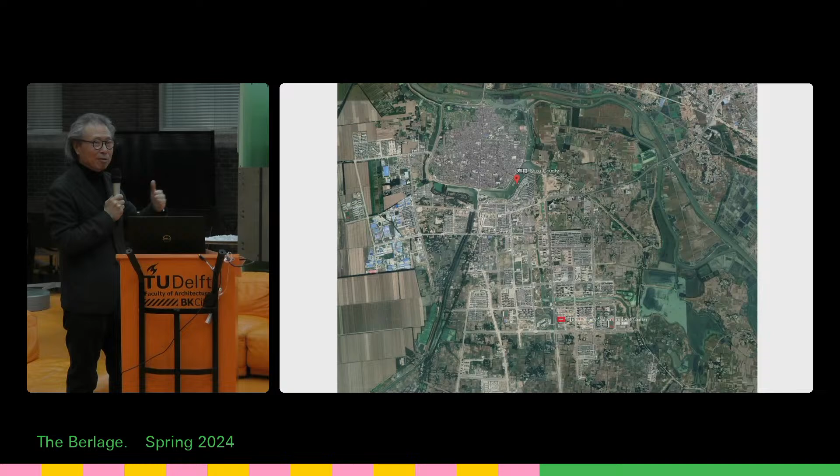You can see this is a typical early Chinese Asian historical town surrounded by a moat, laid out inside on a grid, but the landscape always brings in the sun. You feel inside the city this kind of square town layout, but you need somehow to go inside. Once you go inside, you see a lot of this vertical housing, and people consider this courtyard not only for light and rain, but also for gathering.

They're more like a living room outdoors, with a solid wall against the outside, a small window, courtyard, and then a small alley. I think this is more like their typology.

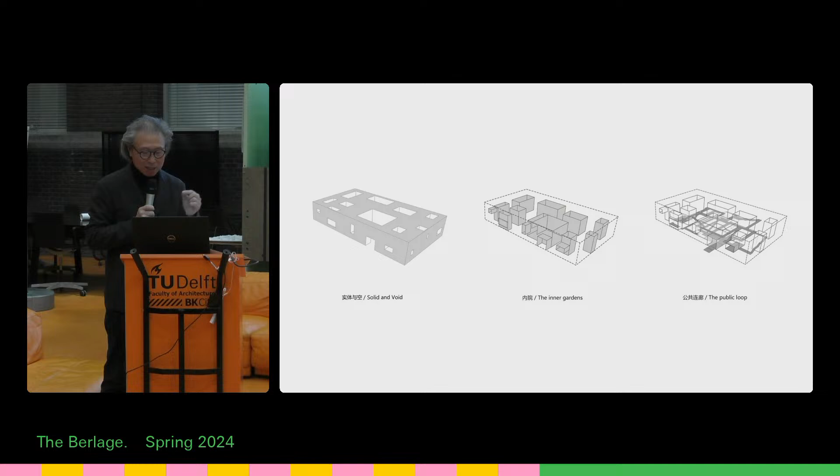This building, since it's not facing a strong fabric, we tried to create something more inward, for example a courtyard series. And then you have a snake shape, more like a stair and ramp, a public corridor. Most of it has a cover to protect from rain and sun, but people can climb up, go to the front.

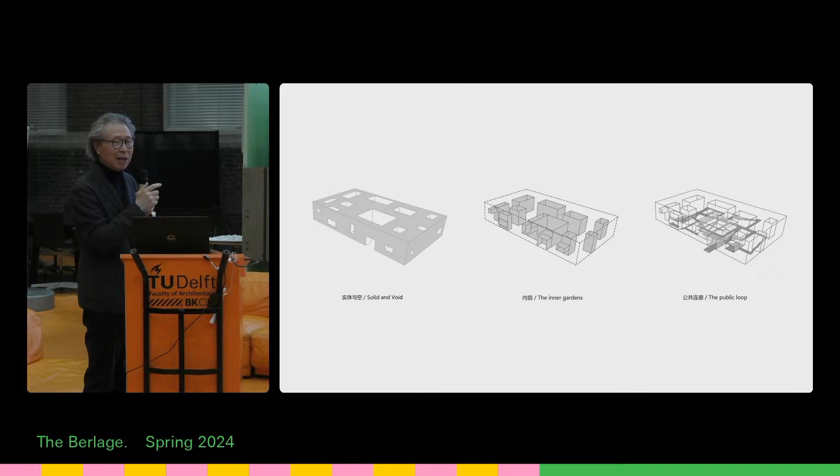The courtyard, and also can climb up into different programs. For this cultural center, they have an art museum, library, archive, a small theater, cultural center, and so on. But this loop is three-dimensional. You can hang out and wander, almost half a day, without interrupting the interior program. But definitely you can very quickly go inside, or you also can hang out. This is more like an inward condition.

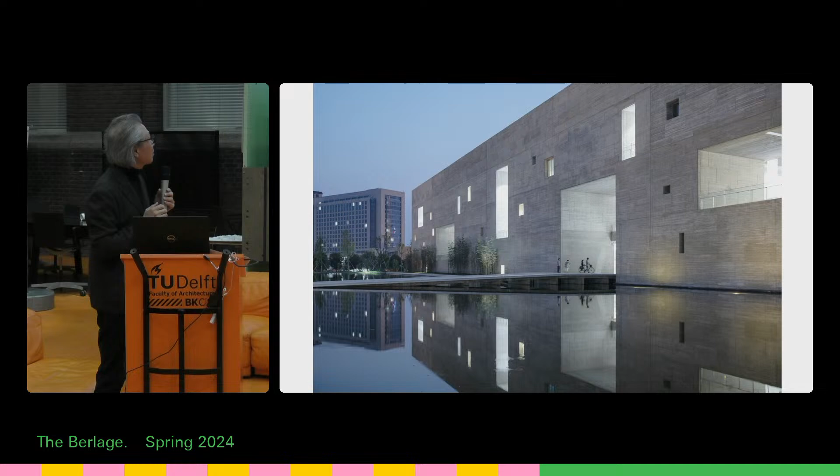You can see the courtyard in different shapes, different scales, different sizes. Even though this is a very complicated composition for the courtyard building, you still can have a sense of orientation and identity. It doesn't matter where you are, you still can have a sense of where you're going to wander.

So this is like a small piece of a bridge representing their old town surrounded by the moat. Once you cross this bridge, you can go to the central courtyard. But this is kind of rough concrete, you can feel maybe more like their old town. This is a central courtyard, multi-layer.

And then you start from here, you can see, and you can climb up, right? This is another stair. You also can start the journey inside this complex. Between this wall, we have a terrace, balcony, and also people, you can see, continue running around.

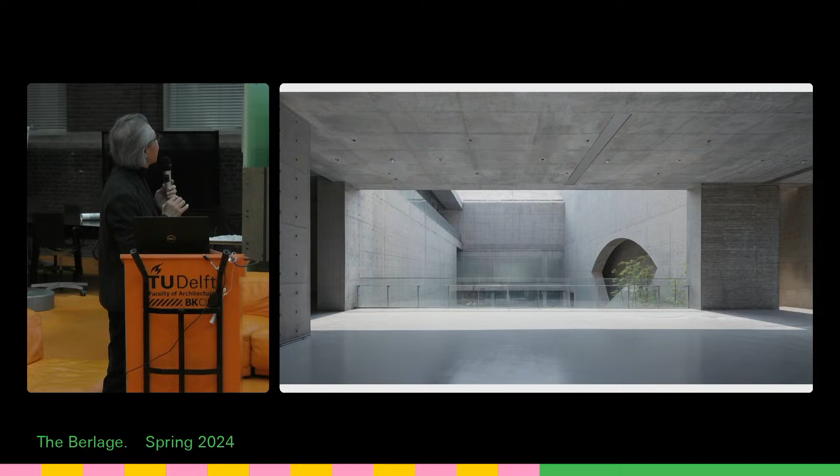This is level 2. You can see this is a back garden. It's an opening dialogue with a stair angled to show more like a garden sense of space. This is a typical corridor, you see a half roof, and then you start to go to the next level from here in the middle.

Then this ramp, this loop continues bringing you up. You see many levels, but you can see through, for example, this big cave, people get to this level, and then they can go to another level, and then you continue. So you feel the richness of this space, but it's never exactly the same repeated.

This is from outside. You can see more like what I call a kind of inward character. The material has a strong character as well.

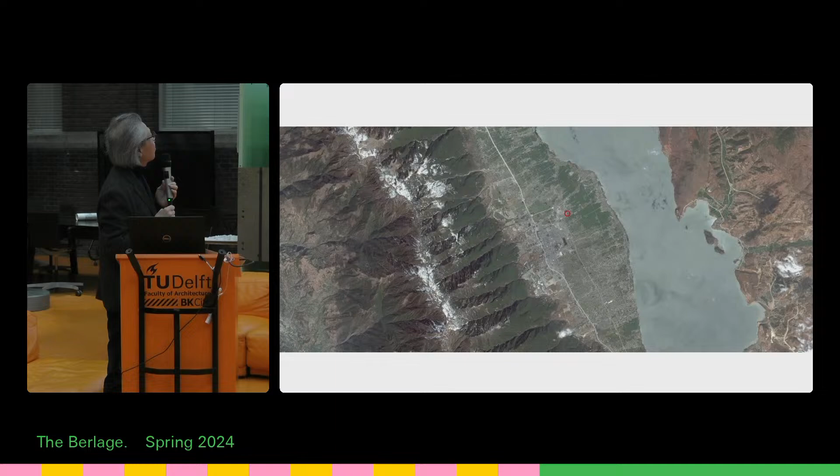So this is the last one. This is built in Yunnan, Dali, a very far southwest part of China. Dali is like a huge valley with farmland and a lake. This mountain is more than almost 4,000 meters high, and the locals are a minority. This performance art center is designed for the very well-known Chinese dancer Yang Liping, who spent most of her life rediscovering the local music and dancing art.

For this region, people are so happy, they pretty much like outdoor life. They sing and dance in the farmland, or inside the mountain, or while they're fishing. Very interesting - the movie talks about how the girl and boy date each other, through singing, such a romantic, lovely city here. But you also can feel very strong domination by nature, the mountain.

Even the local construction and culture doesn't try to go very specific - the building is never perpendicular, and there's a lot of rock mountain nearby. So everything is so organic, but only one line, which is mountain meeting lake, one horizontal line. For this design, we just try to catch this one horizontal line, dividing above - the roof above, roof underneath - the yin-yang, cave, and the nest.

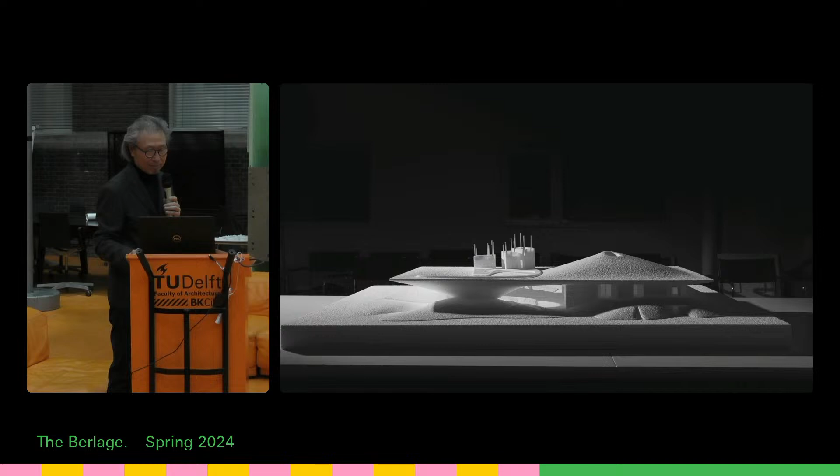So this performance center is not just one theater, but actually one amphitheater working together with one theater, more like a cave. And the nest idea - you can see this is our final model. The amphitheater is on the left, the right side is more like a theater. But sometimes both theaters can really work together - the sliding door opens, and the two theaters become one.

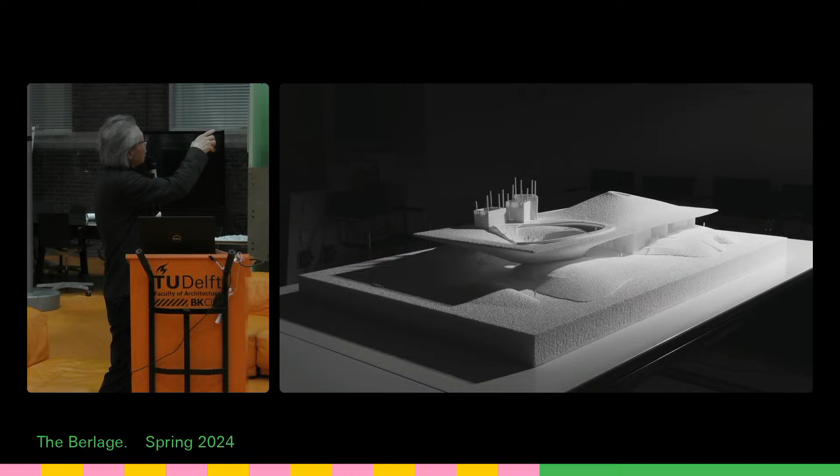And then her performance is going to start from this landscape hill, flowing down to a little bit of earth, and then climbing up to the amphitheater, and then flowing inside the theater, and then coming back. So more like a three-dimensional attempt to capture the local performance, folk art.

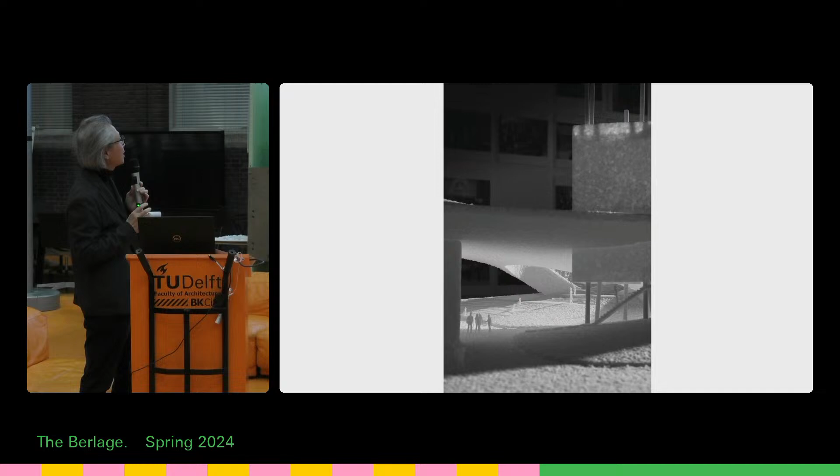The locals also have a lot of tree houses, so we use the vertical cubic to bring people up and down. Inside is a tea house, bookstore, cafe. But this you can see beyond the amphitheater and also above the roof - this shows the two theaters, how they work together, the amphitheater and the theater.

And this is after it was built. You can see beyond Cangshan Mountain, and look this way—it's a huge lake, local people call it the ocean. This can be more like a meeting place rather than just an interior theater.

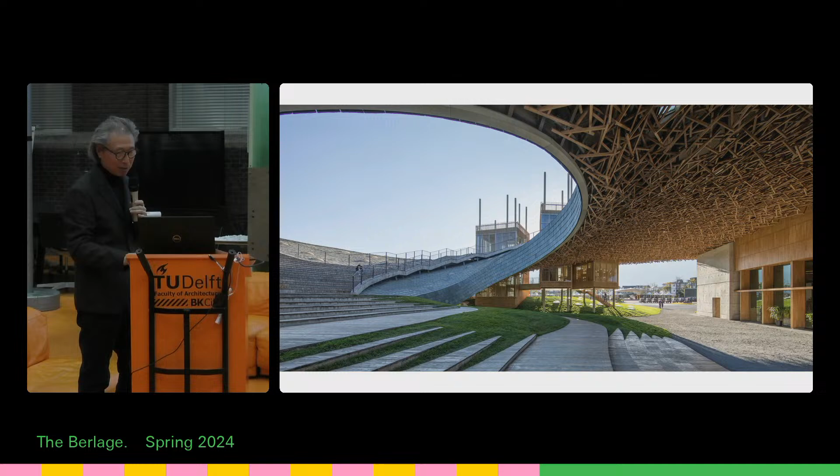The material decision making also strongly catches up with the local material construction sense. Like this ceiling, we use rods to form triangles, and then form the whole ceiling. It feels very complicated, but it's actually very easy, more like a brick—just one module, just repeat. The wood ceiling is just one size, three-dimensional, like a triangle. And then you can climb up.

The roof material is local, like sandstone. It's more like broken pieces—we show the character or texture of this material. So people can sit there, climb up, drink tea, and see beyond.

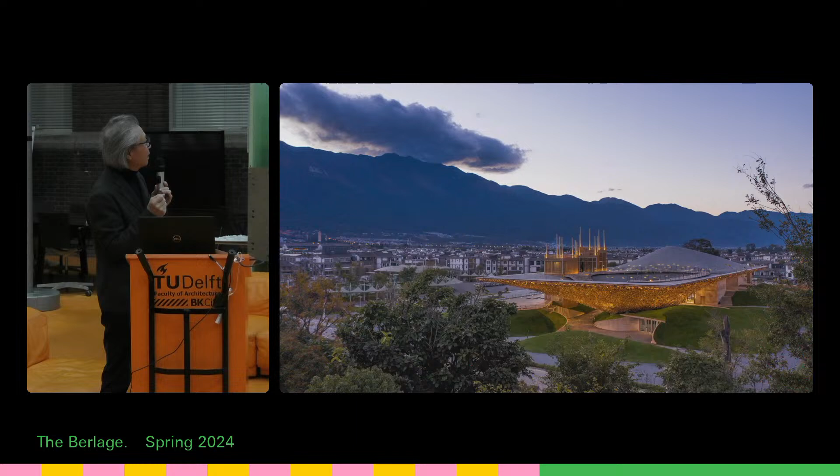So you can feel this is much more open rather than the previous few projects. We feel this is nature, this is what locals love—outdoor. So we create a place that's not only a theater, more like a social meeting place.

So through this project—maybe like 6 projects shown here—you can see they're located in different natures, but the architecture also shows more diversity in form, material, and decision making. But this strongly shares one idea, which is architecture and nature.

I mentioned rootedness and innovation—creating tension between tradition and innovation. This gives you the feeling that architecture is no longer very old or severe, only driven by technology without any cultural sense. I think this show is pretty much strongly trying to point out how we can approach contemporary architecture, rather than just showing what we have done.